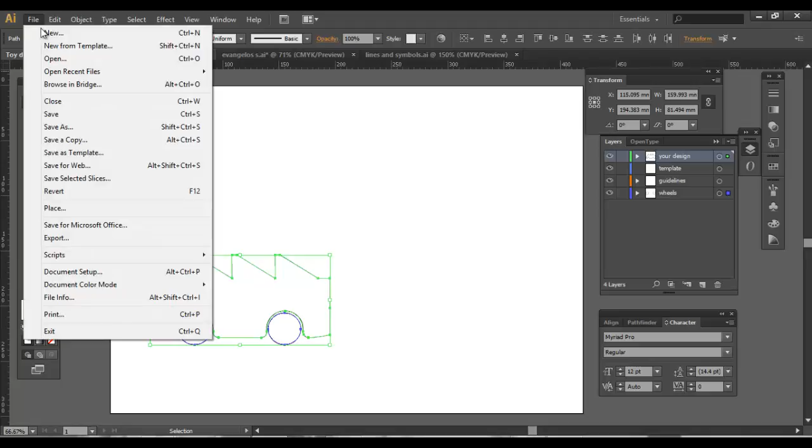We're going to just copy both, Control C, and make a new file, A3, horizontal format, give it a name. Your name will do nicely.

Control V. There it is. Now we're going to create a new layer here. Layer 1, layer 2 will basically have either the body or the wheels.

Control X, Control V, Control Z. What should I have done? Control F. Okay, let's select all that.

Right, what we're going to do now is we are going to extrude, make into 3 dimensions this 2-dimensional drawing. And to do this, we need to actually have a shape, closed vectors, no lines, no broken lines.

It has to be a closed shape. Always a closed shape, otherwise this particular effect in Illustrator will not work.

So we select all our shapes, all 3 of them, go to Effect, 3D, Extrude and Bevel, and work within this dialog box. First thing you want to do is go to the Extrude Depth and choose 250, and then click on Preview.

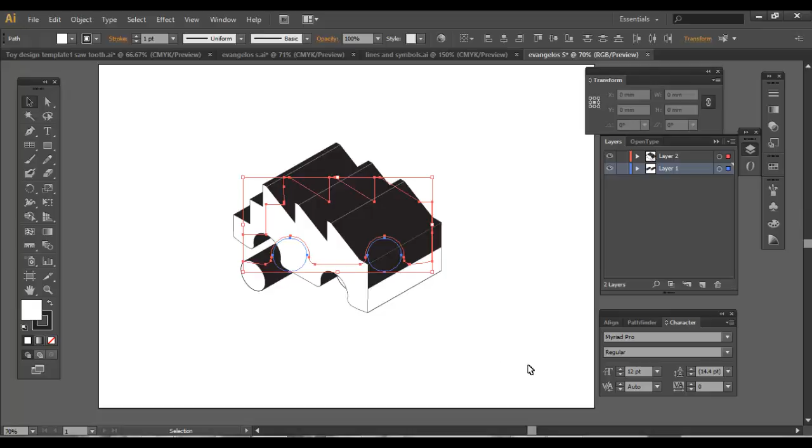Select everything again, and this time we need to go to Object, Expand Appearance, and now it's converted that effect into vectors, into shapes.

And we need now to actually choose the default stroke and fill, and we're almost there. You can see what we're trying to achieve here.

Remembering, once you've finished this drawing, you will print this out to render in your favorite medium. The textures, I think it's wood grain, yeah. Okay, let's finish this drawing first, of course.

So what we'd like to do is work with these cylinders. Firstly, let's just lock the top layer and put the cylinder into position, and once we do that, you'll see there's a little problem that we have to fix.

Right now, because our cylinders are in the bottom layer, the actual form of the body cuts right across them.

Right here, yeah, cuts right across them. So if it had the other way around, that wouldn't work for us at all, would it?

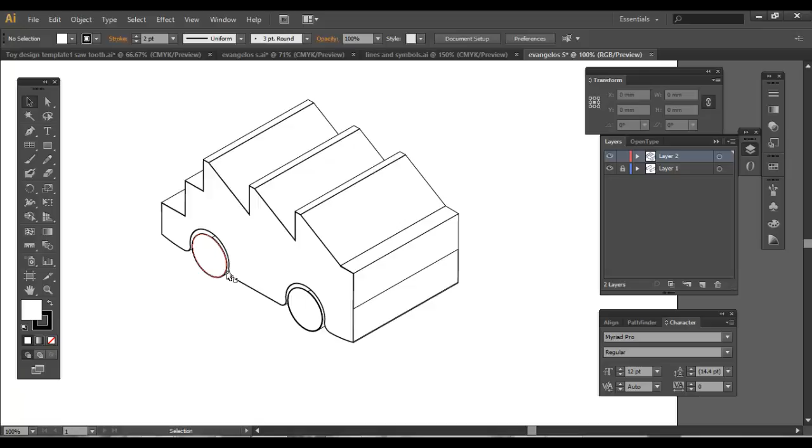So we're just about there. We can also use this drawing and insert it into our orthogonal drawing. So if we just unlock it and lock the body layer, layer 2, select all of that information and make sure you group it - Control G. Otherwise we may miss out, because I've ungrouped it before, so we may lose some information when we copy it into the other file. So let's unlock the top layer, Control C, and let's go back to our orthogonal drawing.

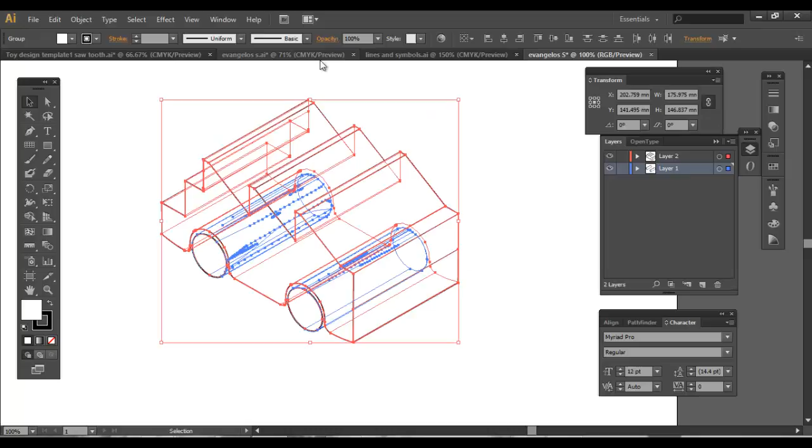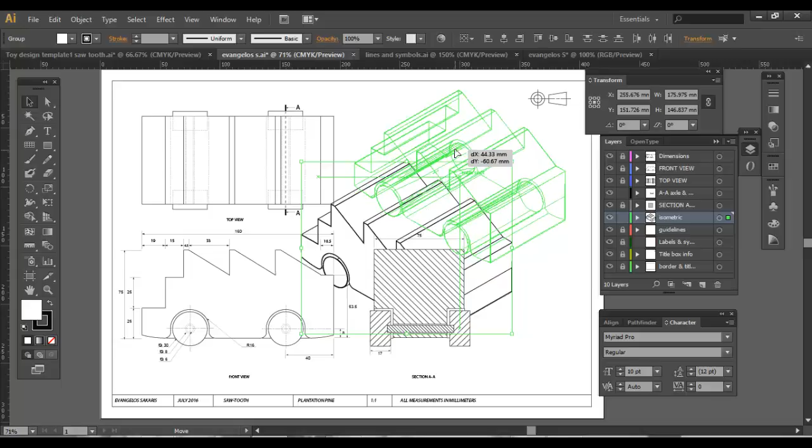Control V. You'll notice that I've actually created a new layer above guidelines and named it isometric, just so I don't get confused. Now, our vehicle is to scale, but...

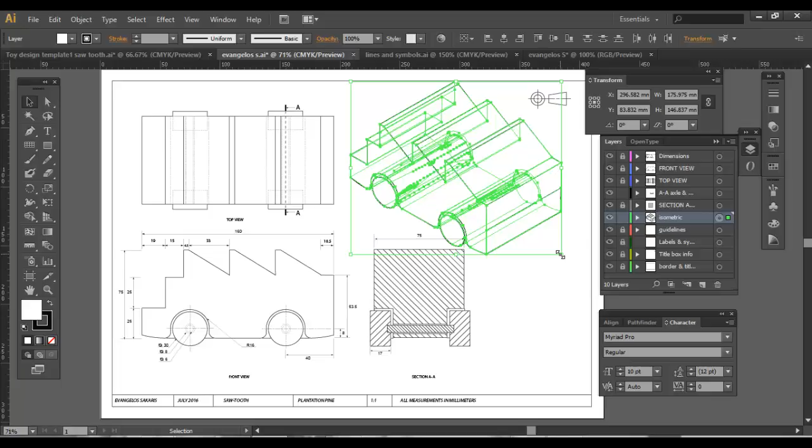There's our vehicle. It's just a little too big, but it's the same size as our front view. So let's select it again, select everything including the wheels, and let's just make it a little smaller so it fits neatly into that corner. And we have an additional drawing to our orthogonal drawing.

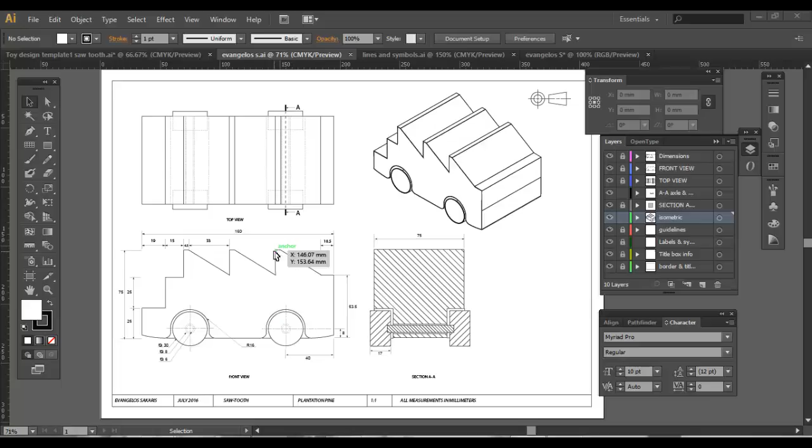Now, before we finish with this orthogonal drawing, there's a couple of things which I haven't actually covered for those of you who will not have a body which is 75 millimeters high. It may be lower, or your cross section AA may not correspond to a solid right through. So, in fact, if we bring the guidelines back...

Bring it back to guidelines, you'll see that I've actually made an error myself. So I'll put my guideline there. My axis AA, which is this line right through here, actually intersects at that point. Now that means I'm seeing a solid out here.

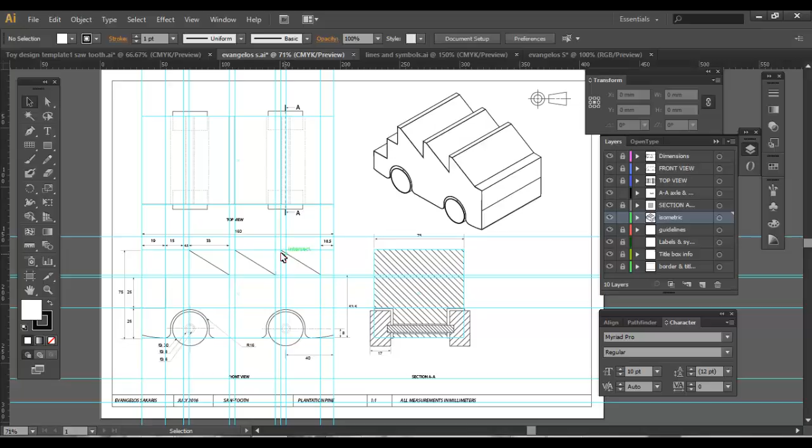The way to rectify this is to lock everything else, go to the view which has all that information - let's see, that's the one. Unlock that, lock everything else. What I need to create here is reflect that information, so I'm going to bring down a corresponding guide that intersects with that axis, which is right there.

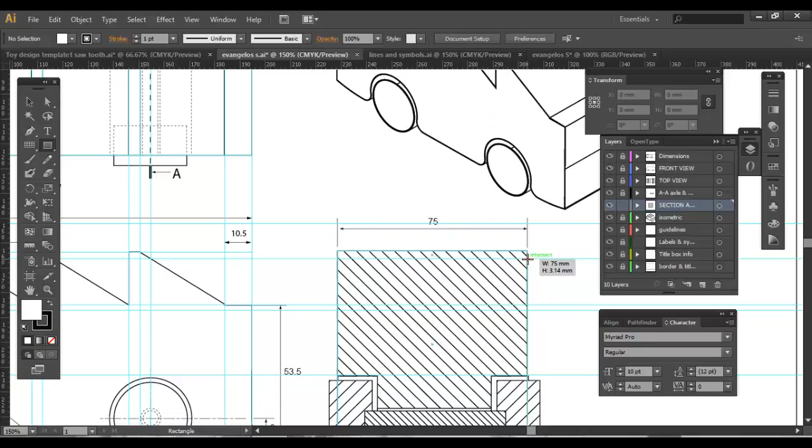Now, strictly speaking, the actual section, the cut through, is happening a little lower than what I've shown. So I've got to take a little rectangle, draw it over the top, and block out that information. Now that is far more accurate.

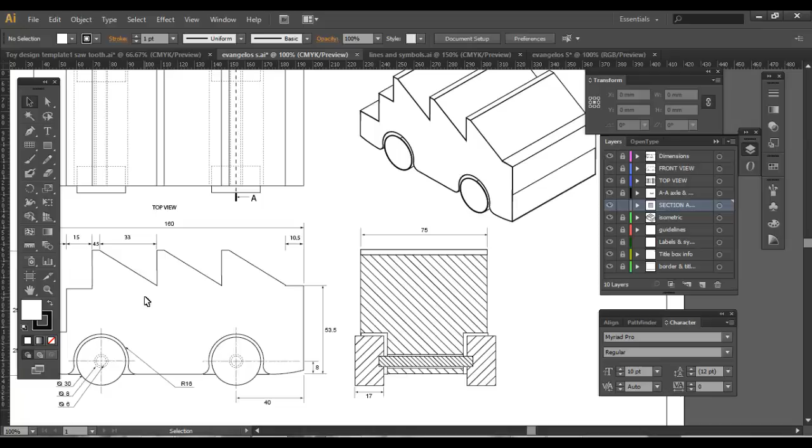For some of you who won't have a body that's 75 millimeters high, when you go into create this particular hatched box, make sure the size of that box is the height of your body. The width remains the same - it will be 75 - but the height will be whatever the height is of your particular design. Okay, don't forget that. Don't assume you go 75 by 75 as a default. You go 75 by 75 only if you have a body which is that size.

What would happen if I didn't have that sawtooth information there - that little triangle was missing. Let me just, for the sake of argument, delete that. And I go to Pathfinder - if I can find it, window, Pathfinder, there we are. Okay, and just omit that.

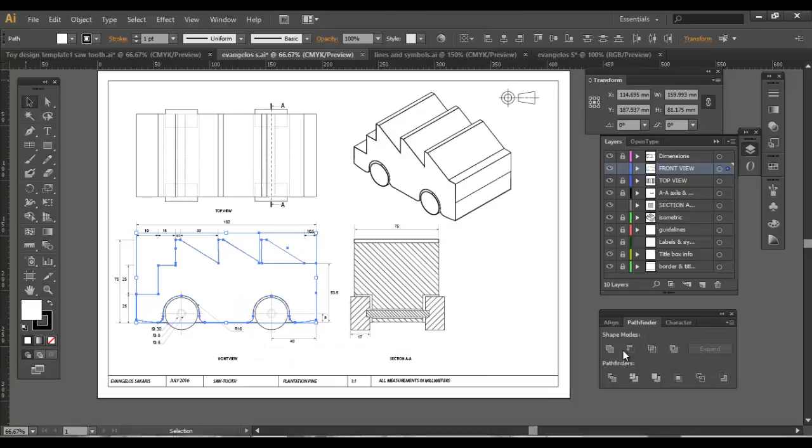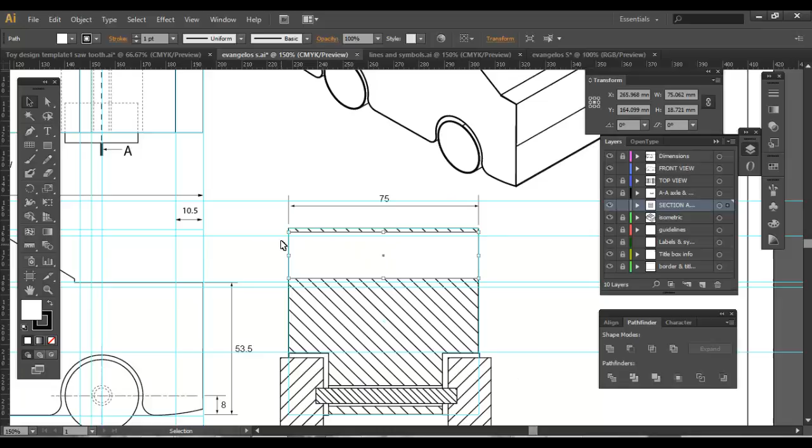Now my sectional view will have to lower even further. So if I put my guides back up, if I go close up, I need to create a box that goes even lower to reflect that information, and drag that back up, go back again, get rid of the guides.

Okay, so the section runs right through the axle, as we said, and our sectional view has to show the information that we can see on the front view. So this white space corresponds to what's seen beyond the section. I hope it's clear, and we are done.